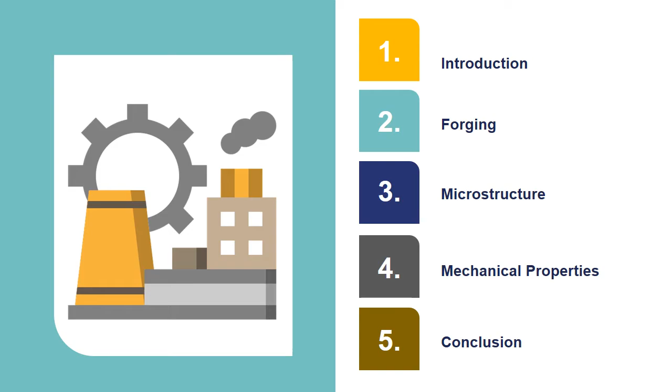In this section, I will talk about my review article. The title is Recent Development in Aluminum Matrix Composite Forging: Effect on Mechanical and Physical Properties. This presentation will be divided into 5 chapters. The first chapter is Introduction, the second chapter is Forging, the third chapter is Microstructure, the fourth chapter is Mechanical Properties, and the last one.

The first chapter is Introduction. Metal matrix composites have become one of the most developed materials in recent years. MMC is widely used for industrial work such as automotive components, aircraft structures, and other industries. MMC provides better properties when compared to other materials. One type of MMC is aluminum matrix composite. In the industrial world, MMC is used in the manufacture of engine blocks, helicopter propellers, shafts, etc.

Aluminum was used extensively based on its superior properties, including high strength, low density, good wear resistance, fatigue resistance, etc. The method commonly used to produce MMC is stir casting. The conventional method in AMC production will produce low ductility due to highly brittle reinforcement and uneven microstructure. Secondary treatment is necessary in order to improve the properties of the composite. The secondary treatment that can be done on AMC is metal forming.

Metal forming is the process of changing the shape of a metal or workpiece by applying an external force so that plastic deformation occurs. The purpose of metal forming is to change the workpiece into the desired new shape and improve the mechanical properties of the metal by improving the microstructure. Various metal forming operations include rolling, extrusion, forging, etc.

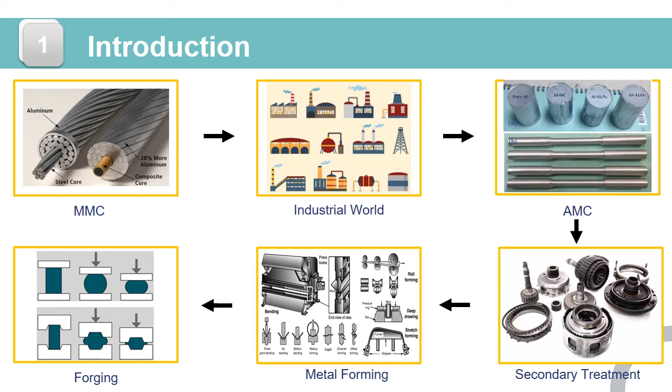Forging is one of the oldest known metalworking processes. Forging is the process of forming metal using the compressive force of a hammer. The advantages of forging when compared to other forming processes are superior mechanical properties, favorable grain orientation, no material waste, greater productivity, etc. The microstructure of the forged composite leads to a uniform particle distribution and improved mechanical properties. Based on the explanation above, this review will focus on the forging of aluminum matrix composites and its effect on the mechanical and physical properties of the aluminum matrix composite.

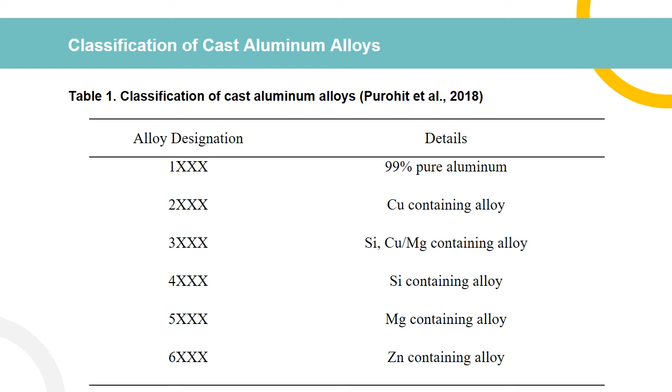We know that pure aluminum is not stiff and strong enough, so aluminum is not commercially used in industrial applications. The mechanical properties of aluminum can be improved by adding Cu, Mg, Mn, and others. Aluminum with the addition of these elements is called an aluminum alloy. The classification of aluminum alloys is shown in table 1.

The second chapter is forging. Forging is classified based on several things as discussed as follows. First, based on temperature, forging is classified into cold, warm, and hot forging. Warm and hot forging require heat when compressive force is applied. Cold forging is carried out at room temperature. The advantages of cold forging are the resulting geometric accuracy, good surface finish, and near net shape products.

Meanwhile, warm forging is carried out at a temperature of 0.3 to 0.5 of the melting temperature. The advantage of warm forging is reduced forging load without any change in hardness of the product. In addition, warm forming at a moderate temperature has all the benefits, including good control of the microstructure and improved strength and ductility. The advantage of hot forging is that it doesn't cause damage to the composite and reduces porosity.

Next, based on the type of die, forging can be classified into two types, open die forging and closed die forging. Closed die forging will cause the metal flow to be more uniform and the surface finish to be better than open die forging. Next, based on the forging direction, forging can be classified into unidirectional forging, bidirectional forging, and multidirectional forging.

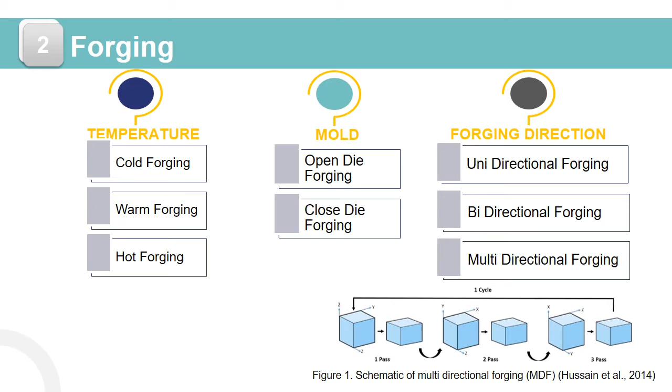The third chapter is microstructure. The phenomenon that contributes to the weakening of the material due to a defect can be referred to as breakage. Some indications of a defect are cavities, microcracks, and shear bands, as we can see in figure 2. One of the parameters to evaluate the forgeability of a material is the surface crack.

When the forming process is carried out in hot conditions, metallurgical phenomena such as recovery, recrystallization, and grain growth will occur after the deformation process. If deformation is carried out at high temperature, grain growth can occur, to reduce the stored energy. In the research conducted by Keshavamurthy, it was found that there was a reduction in grain size in specimens subjected to secondary treatment.

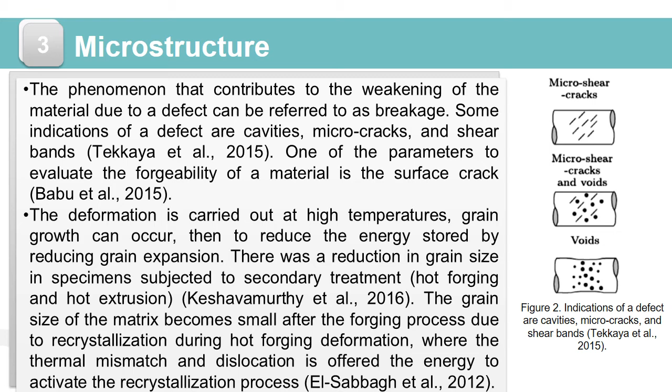The grain size of the matrix becomes small after the forging process due to recrystallization during hot forging deformation, where the thermal mismatch and dislocation is offered the energy to activate the recrystallization process. From some papers, we know that the effect of forging on the microstructure is that the forged workpiece has a more uniform particle distribution compared to the workpiece that is only cast.

It represents the recovery and recrystallization process. Then, the forged workpiece has a finer grain size compared with the as-cast composite. Grain size changes with the increase of the forging pass, as shown in figure 3, presented by Zhu et al. In line with Zhu, Kapoor et al. conducted a study on multidirectional forging where the Al specimens underwent 0, 3, 6, and 9 passes.

Based on this research, it is known that the specimen with 0 passes shows large grains. With 3 passes, the specimen shows a large number of subgrain boundaries. After 6 and 9 passes, the prior large grain boundaries were not discernible and only ultrafine subgrains and grains were seen.

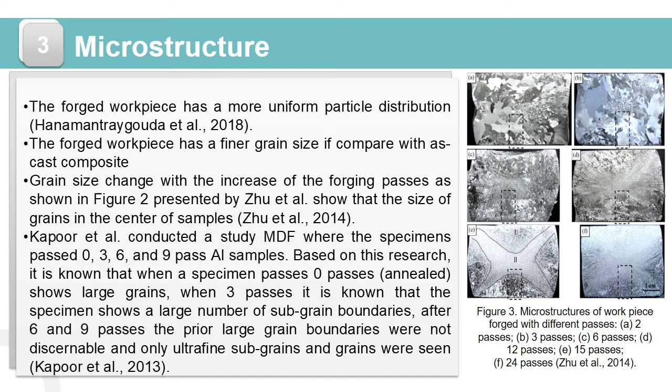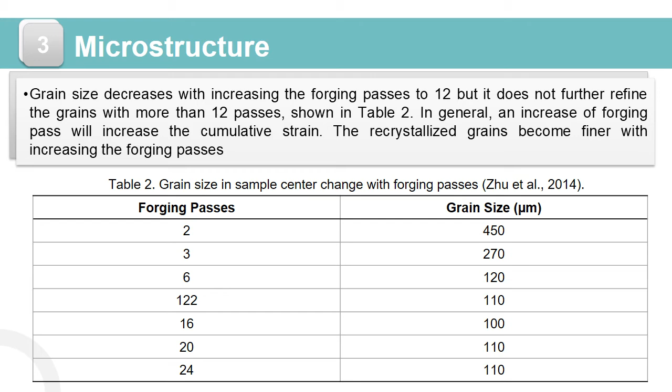Size change with the increase of the forging pass, as shown in figure 3, presented by Zhu et al., shows that the grain size in the center of the sample decreased with increasing forging passes up to 12, but the grain doesn't refine further beyond 12 passes, as shown in table 2. In general, an increase of forging passes will increase the cumulative strain. The recrystallized grains become finer with increasing forging passes.

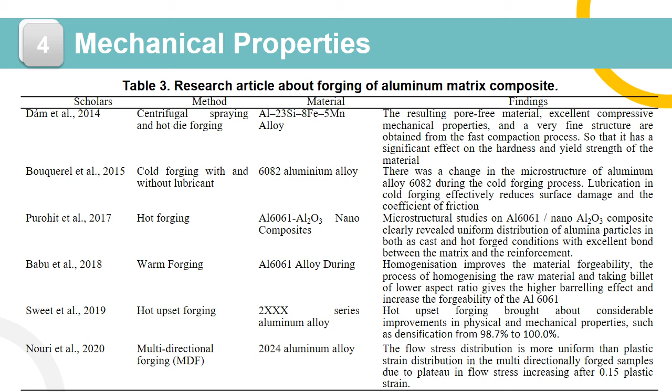The fourth chapter is mechanical properties. Hardness. From some papers, we know that the hardness of the forged composite is higher than the cast composite. In a study conducted by Handrasekhar et al., it was found that increasing the percentage of SiC as reinforcement would decrease forgeability but increase hardness. Different forging reductions, such as 20%, 40%, and 60%, increase the hardness of the material by 16%, 33%, and 45%. That means hardness increases in line with increasing forging.

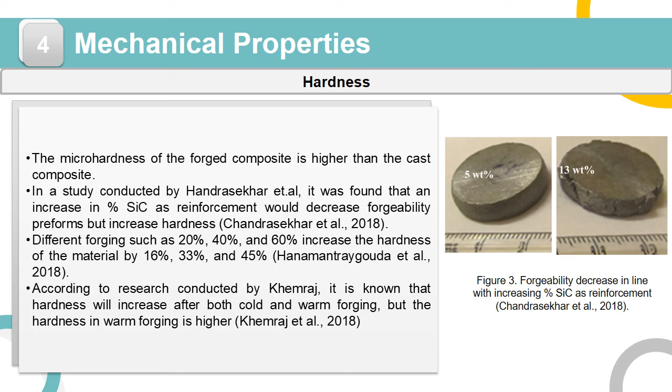According to the research conducted by Khemraj, it is known that the hardness will increase after both cold and warm forging, but the hardness in warm forging is higher because the deformed material obtains strength from precipitation of coherent particles and dislocations accumulated through forming. The hardness increase is directly proportional to the increase in the number of forging passes at an early stage of multiaxial forging.

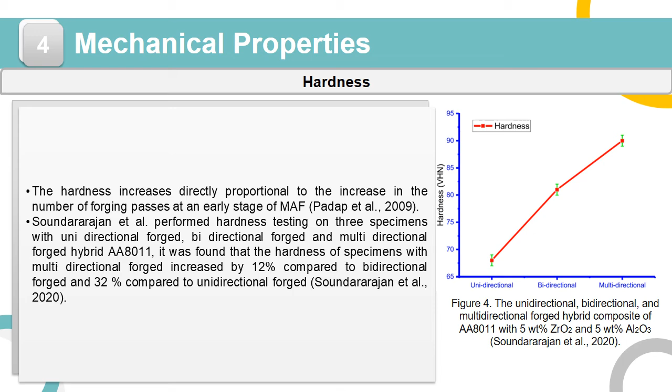According to research conducted by Soundararajan et al., hardness testing was performed on 3 specimens with unidirectional forging, bidirectional forging, and multidirectional forging. It was found that the hardness of specimens with multidirectional forging increased by 12% compared to bidirectional forging and 32% compared to unidirectional forging, as we can see in figure 4.

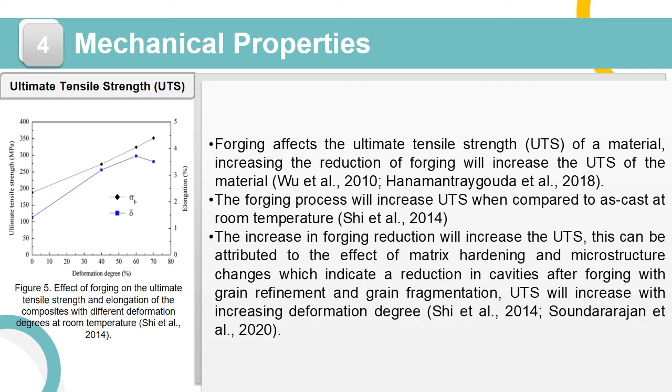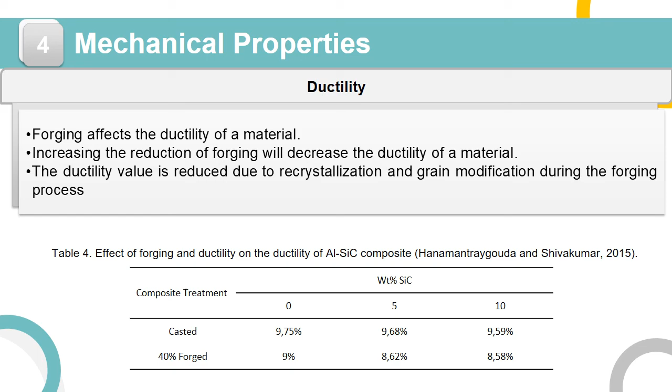This can be attributed to the effect of matrix hardening and microstructure change, which indicate a reduction in cavities after forging with grain refinement and grain fragmentation. UTS will increase with increasing deformation degree. Ductility. Forging affects the ductility of the material. Increasing the reduction of forging will decrease the ductility of a material, as we can see in table 4. The ductility value is reduced due to recrystallization and grain modification during the forging process.

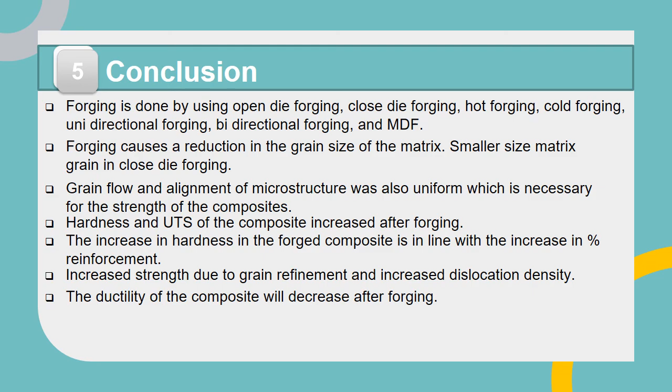Conclusion. The conclusion of this review article is that forging is done using open die forging, closed die forging, hot forging, cold forging, unidirectional forging, bidirectional forging, and multidirectional forging. Forging causes a reduction in the grain size of the matrix, with smaller matrix grains in closed die forging. Grain flow and alignment of the microstructure were also uniform, which is necessary for the strength of the composite. Hardness and UTS of the composite increase after forging. The increase in hardness in the forged composite is in line with the increase in percentage reinforcement. Increased strength is due to grain refinement and increased dislocation density. The ductility of the composite will decrease after forging.